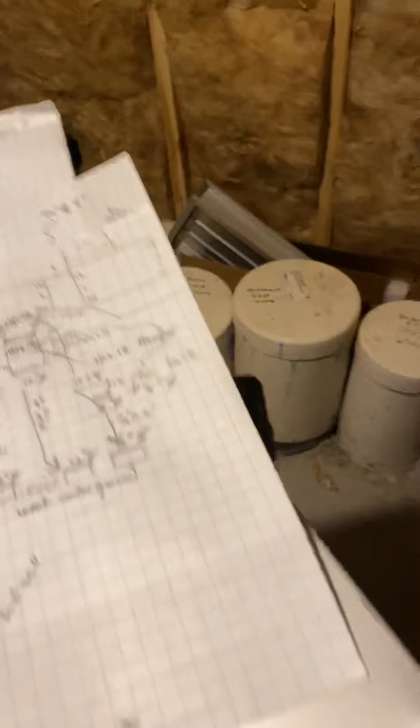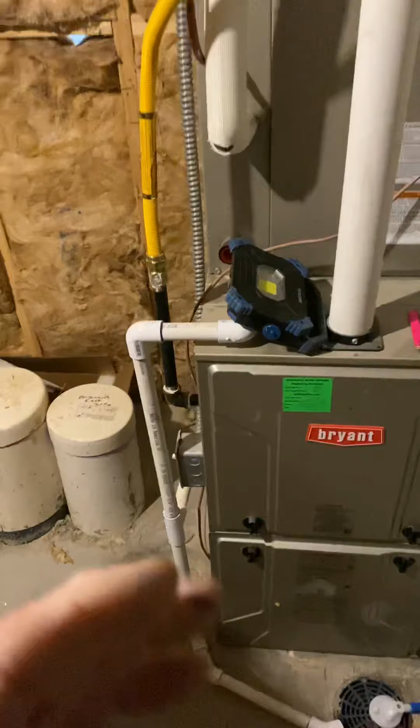Okay, this is on the fail job, number 53359. Okay, what we're doing is a basement redo. We're going to redo the duct a little bit and/or a lot and add some zones. So

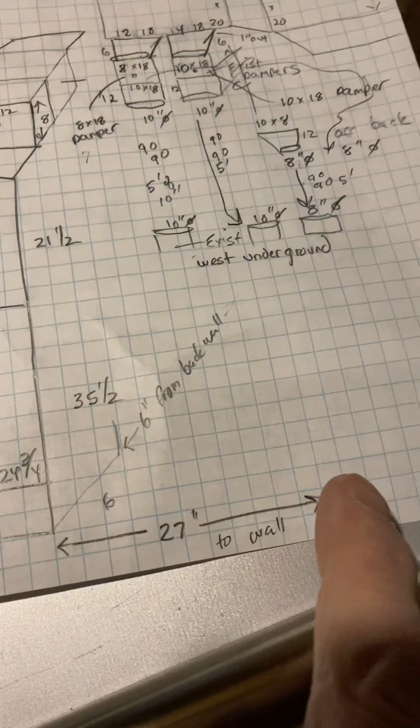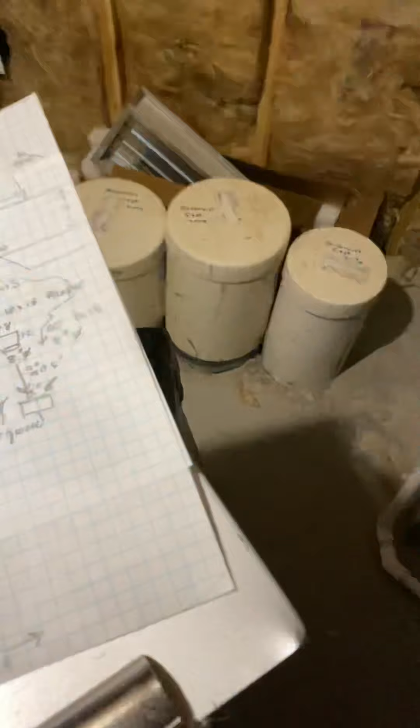right now we're going to move our furnace so it's 27 inches from the right side wall. We're also going to move it up so it's 6 inches off the back wall. We're going to do that so we can run a return air behind the furnace, a 6 by 36 return air around the furnace and along this wall.

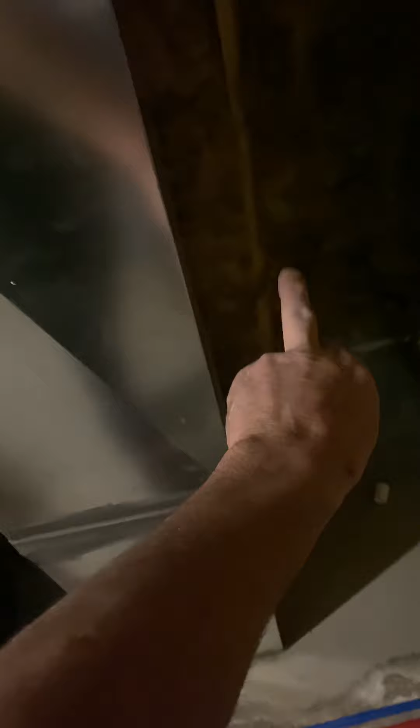We're going to put a return air here for that bedroom, a little 14 by 8 baseboard. And in the back here, we're going to put a big 36 by 10 baseboard grill in the hallway here. Get it over here. They're actually going to have a beam here, and they're going to redo the framing here. You can see kind of on the ground, I think. So get it over here.

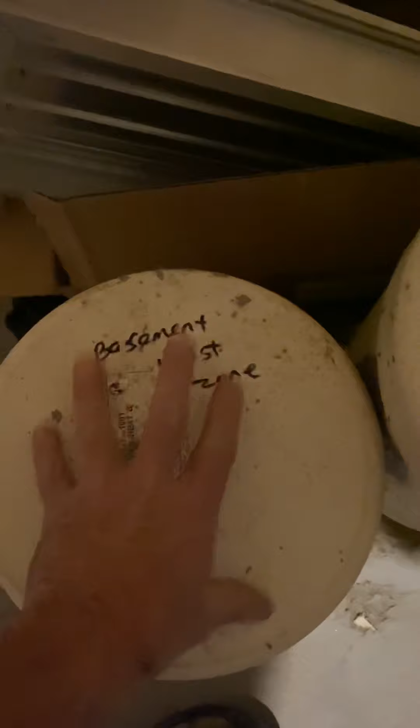Okay, so this zone's a little bit different than the scope. We're going to make it 5 zones. Okay, so this basement west zone is 1 zone. These other 2 pipes on the right are 1 zone. So I wrote them as basement east. So it's 2 10-inches and an 8-inch round. Then

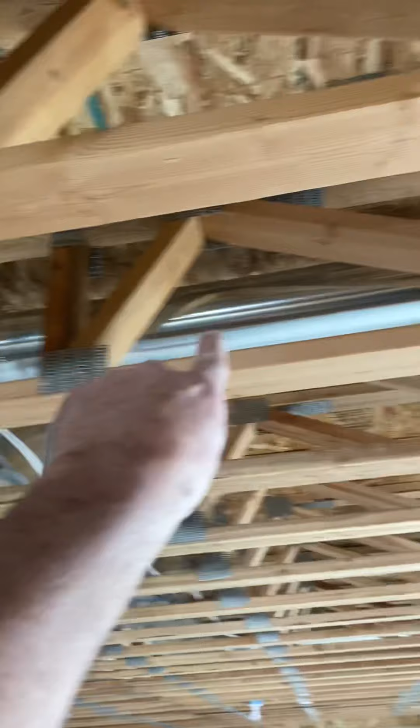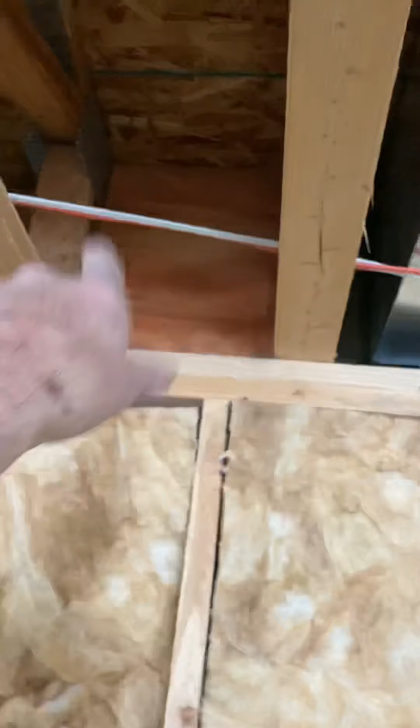the master bedroom, which is this duct here, is going to be 1 zone. We will have to take off some heat vents. So this vent here and this vent here, we need to take off and patch. Otherwise, I'm just going to leave that. And I have a cut line right there. Next to it, we're going to run another pipe, a 10-inch round, with Y's.

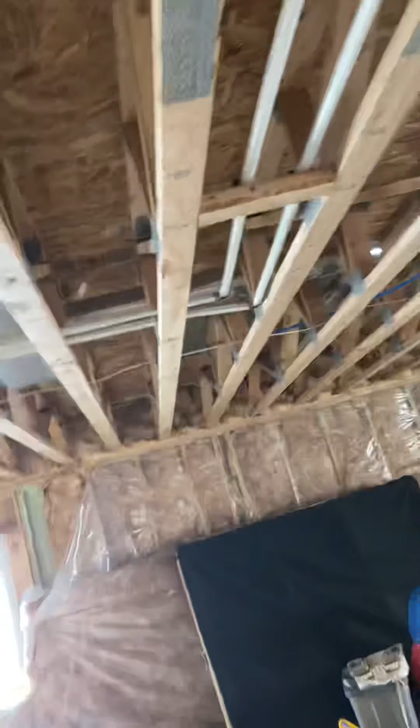So we're going to have a 10-6 Y just in the hallway here. We're going to run 6 inches over and then go that way and get that one here that goes under the kitchen sink, the toe kick. And we'll disconnect these 2 off this end cap here and put a new end cap on it.

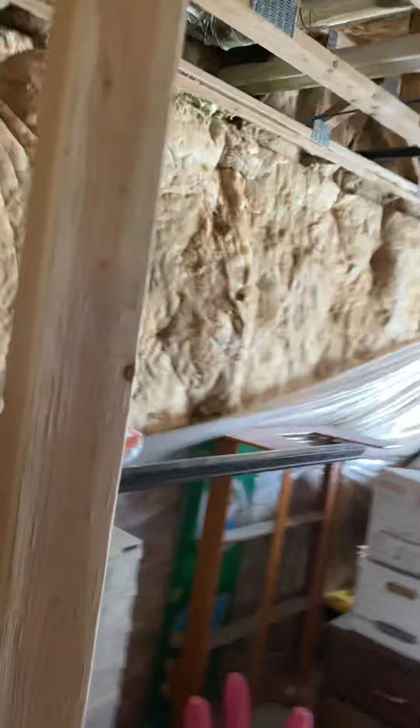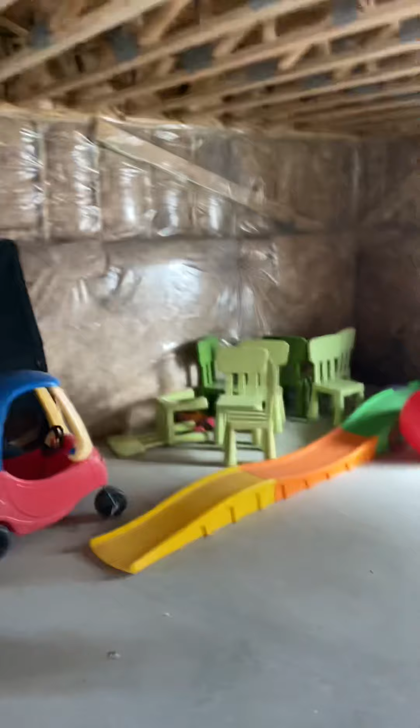But otherwise, those 2 are going to come off this other duct that we're going to run with all the Y's. So the Y's are going to pick up those 2 that we capped off over here and these 2 that we take off over here. And that'll be its own zone. Sorry, and this one here. So those 3. Okay.

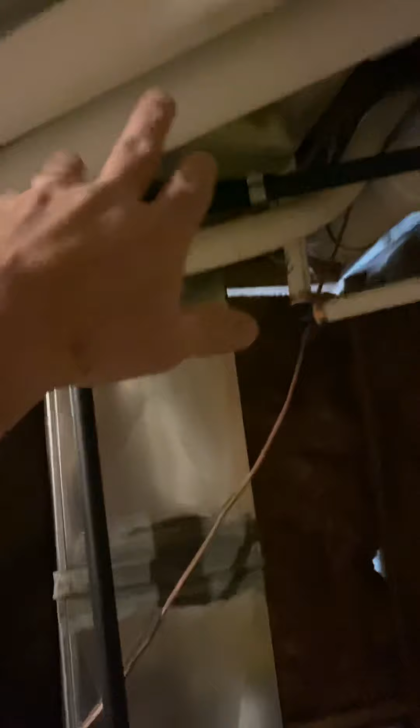Next, so all this ductwork is coming out. All this return air is coming out all the way. Rip out all the panning, all the return air duct, all this panning, all this duct all the way down. In place of that, he doesn't want any duct board. He wants to be able to brush the ducts with the duct cleaner. So

I gave you some flat metal that we're going to put here and then just some duct board headers. And then we're going to run 12-inch round pipe from one box to the other. 12-inch round all the way over and then down, and poke through here. And then, okay,

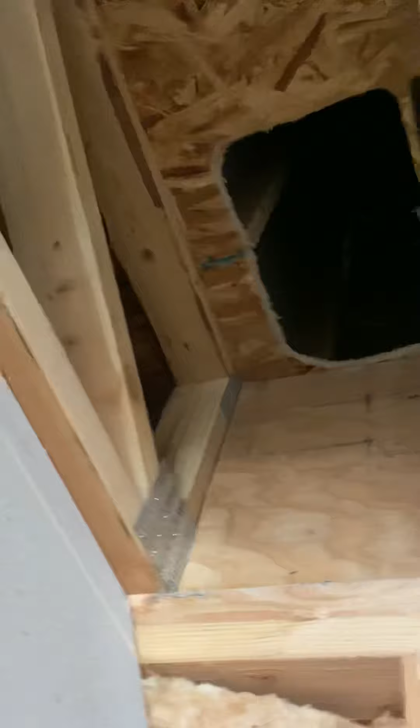this is also a return air. So I gave you a piece of panning for here as well. And we're just gonna have to blank this off with metal the best we can. Well, I'll go over that in a minute. Okay. So

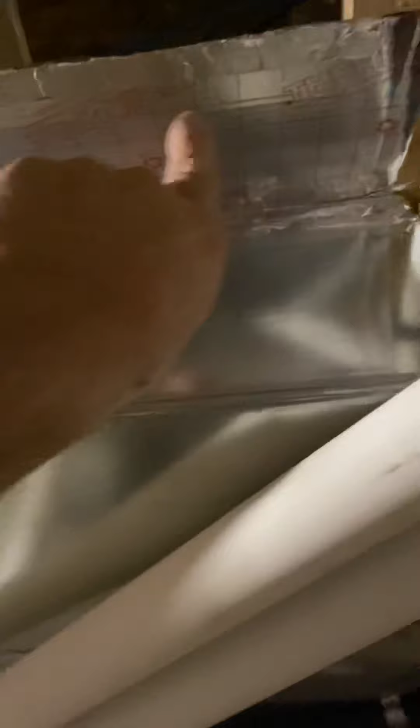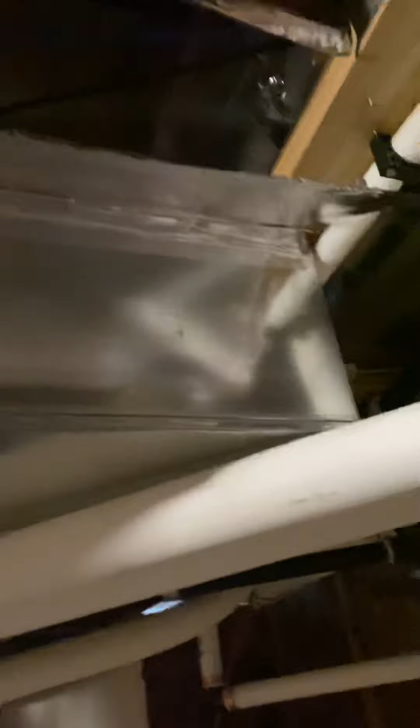on this duct here, I have a cut line just right here. And here you're going to just put a square around here. All this is coming out, this is coming out. So this duct here, they actually came through the return. If you can see it. It's a 90 through the return, and it taps into here. But it's all coming out.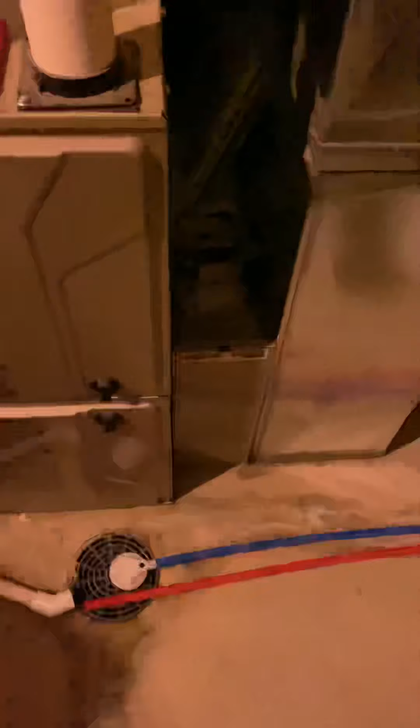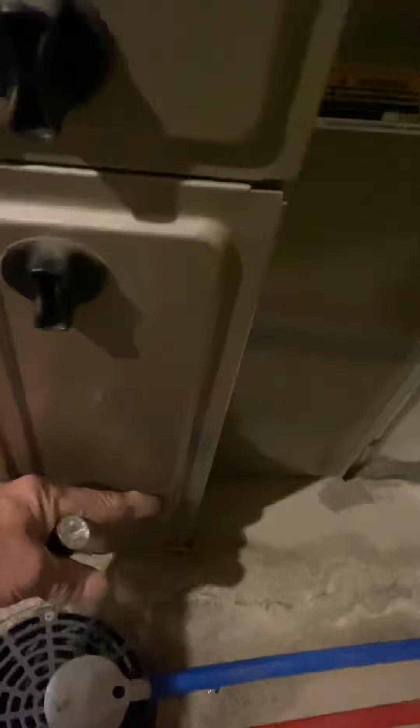Our new return air is going to be on this side of the furnace instead of this side. So we're scooting this furnace over and putting it on a base. And I brought it forward just enough so the edge of the base is going to be right at the drain, I think. And the furnace will overhang the drain. So we're not going to block the drain, but we'll be over it with our furnace.

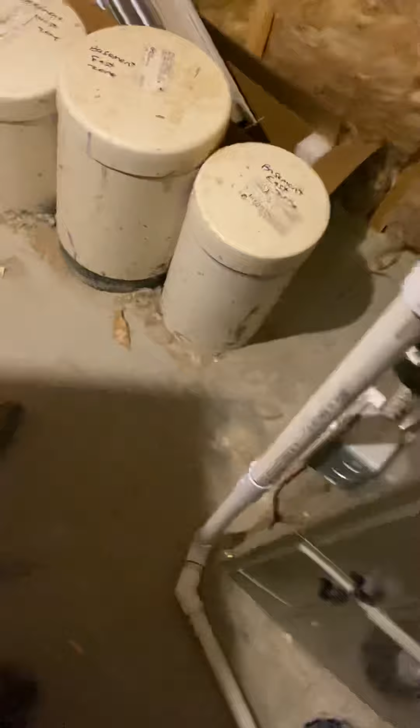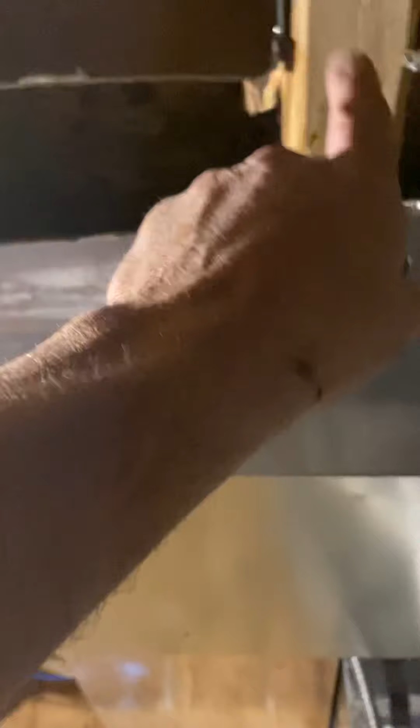Our new return air will come here. And then it'll offset over 20 inches and you'll have a collector box up here. And my notes are all scattered. I need to rewrite them so you can understand.

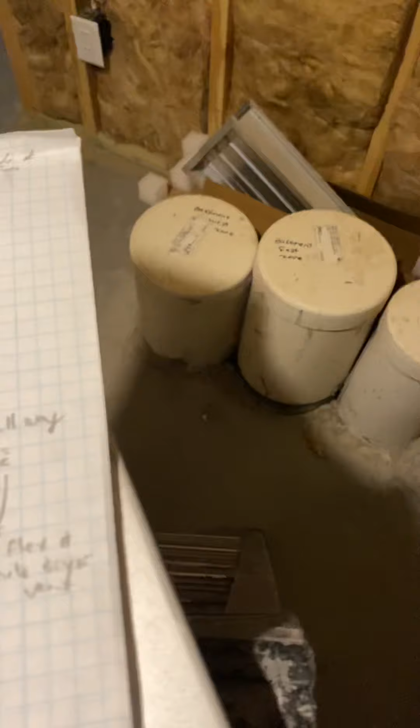But see, where is that one? I'll find it in a minute. Anyway, no, I need to find it now. There it is.

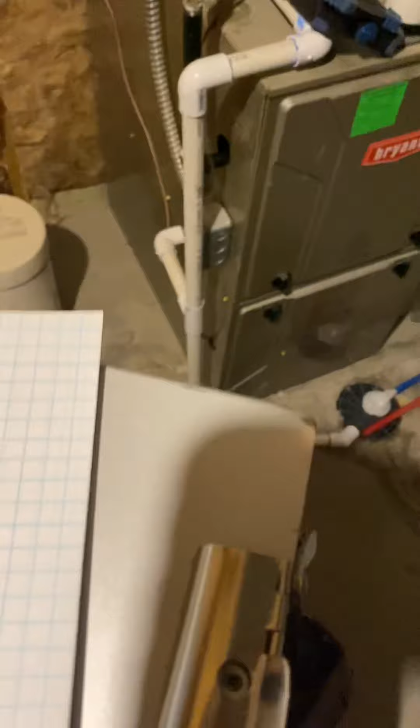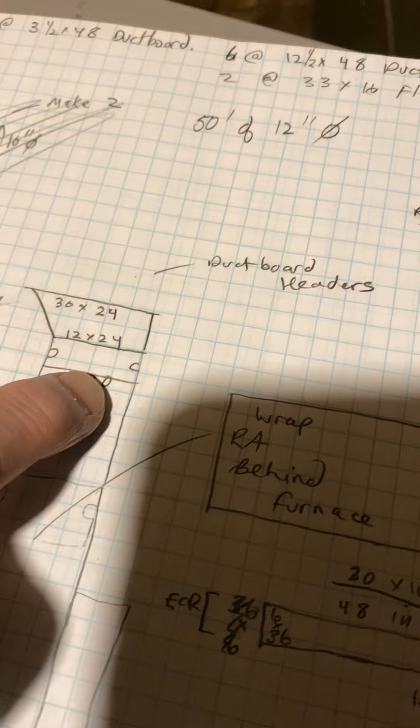Okay, so this will be your return air. This, and then the bottom will come forward 20 inches. I'll put your canvas up here. You have to come down enough before we offset over to make room for our duct coming out the front for the basement zones.

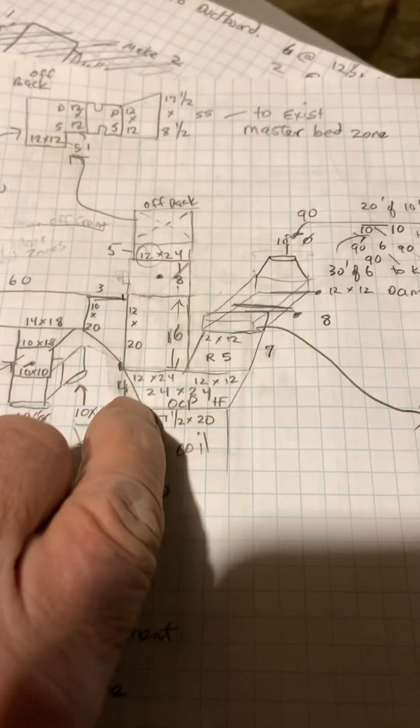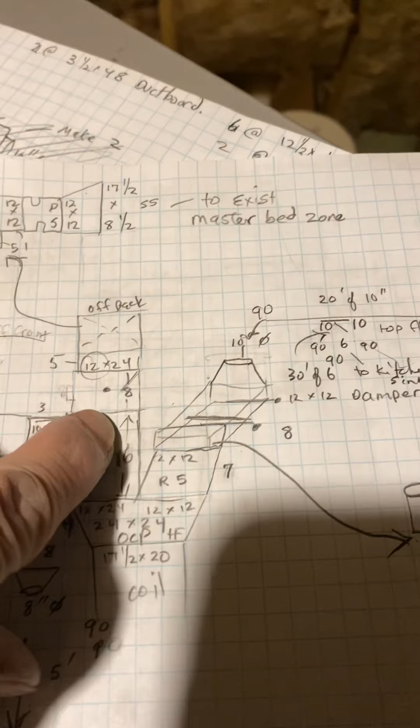But the way that looks is you have the coil, then I have a transition to a 24 by 24. Then you're going to have this piece of duct here, and then a damper, 12 by 24 damper, with the rod coming out the front. Here you have an offset over 5 inches, so you'll offset over on this side of the truss so you can hop up in the middle of them.

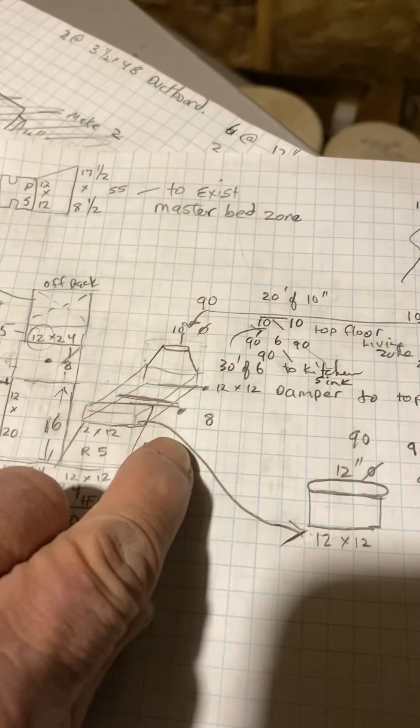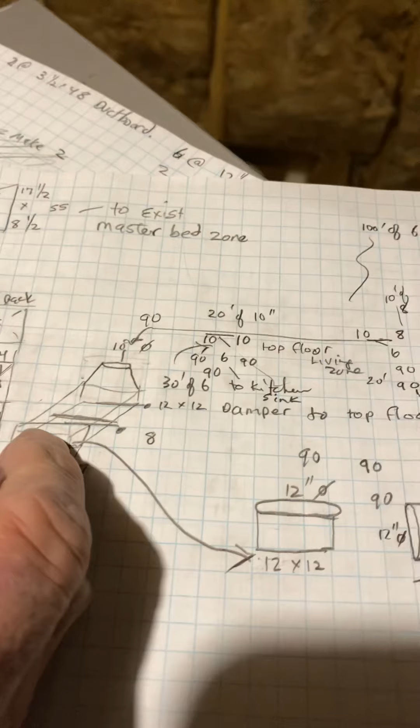And then 2 dampers, 12 by 12 dampers, and then 2 square-to-rounds. This one's 12 by 12 square-to-round, and one up the back would be as well. 12-inch round.

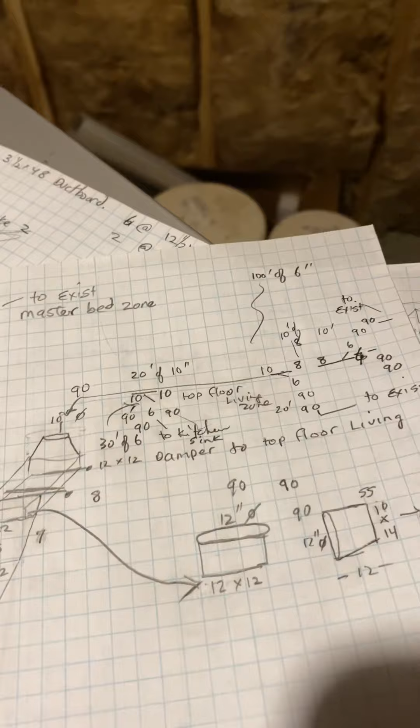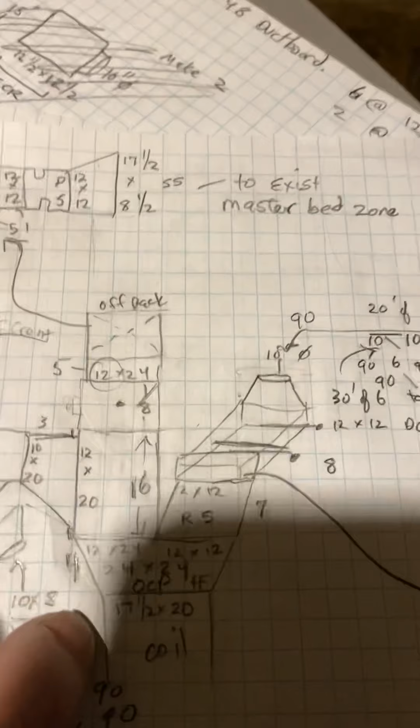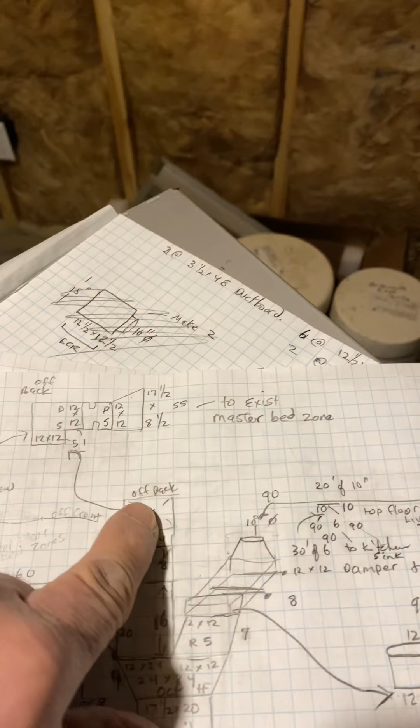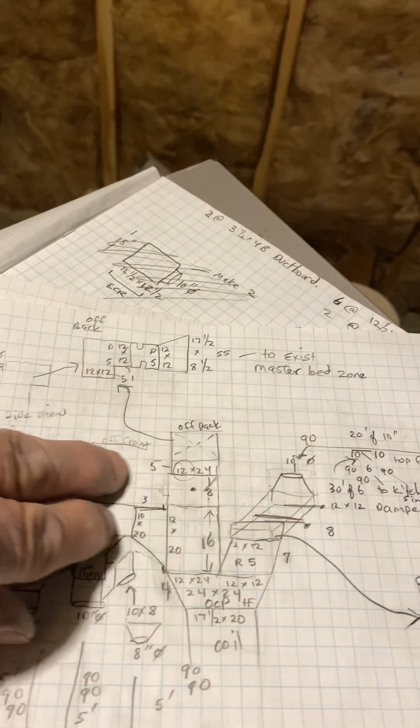Okay, so in this one here, we'll just 90 and then tie into our existing duct for the master bedroom. Okay, under here, that's why I put the damper high here, is so you can get a duct here up the side, a takeoff. 5-foot piece of duct with an end cap. And I have 2 starting collars.

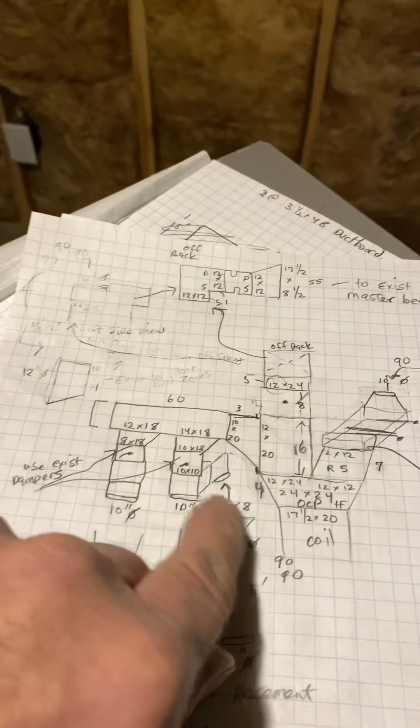And you're going to use the existing damper. So you have that damper here, you're going to reuse on the basement zone, and also there's a damper in a box right there you're going to reuse on the basement zone. And then this one just connects to that pipe. I have 2 square-to-rounds off this one duct. So one will tap into that one. This one will tap into that one. So you have to kind of go around the pipe.

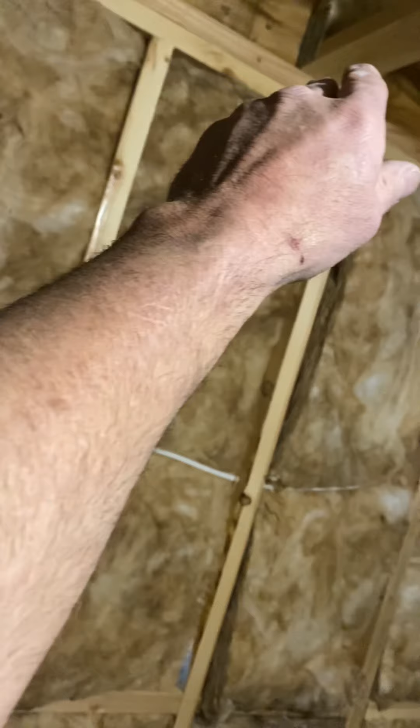Okay, so then the return. You're just gonna, let's see. Oh, I already went over that return. Okay, so

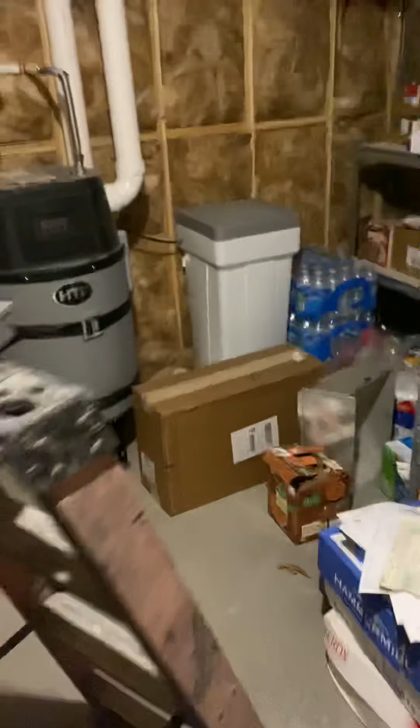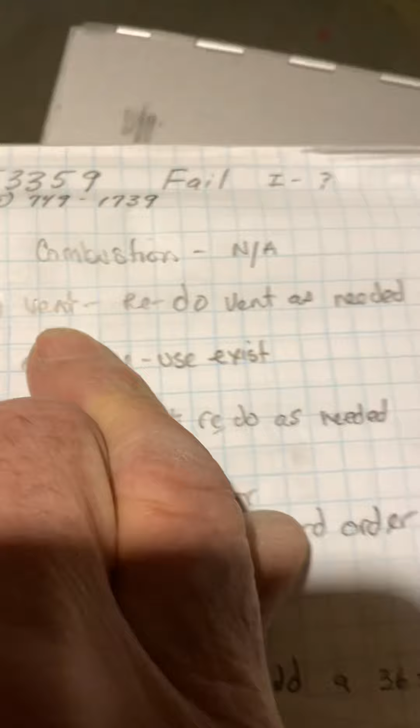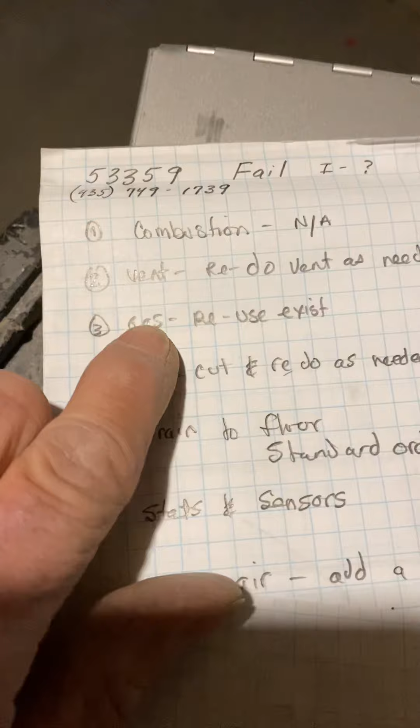Combustion air not applicable. Your vent, since you're going to move the furnace over, you obviously have to redo the vents a little bit. I give you plenty of fittings. The gas, they just have a super long flex here, so you're just going to reuse it and hook it back up as needed. The AC, you will have to cut this line and couple it back together. Okay, drain just to the floor drain there.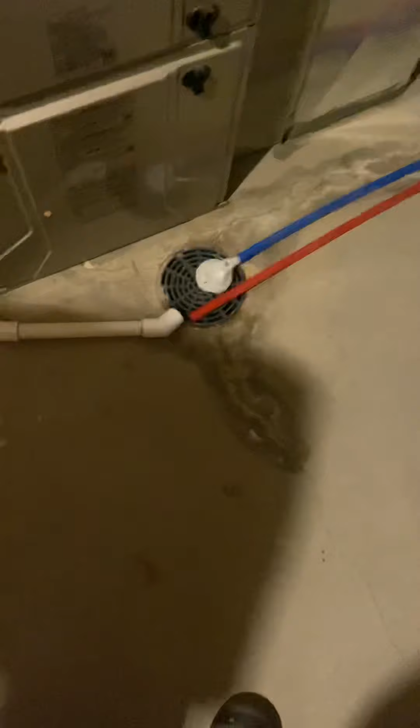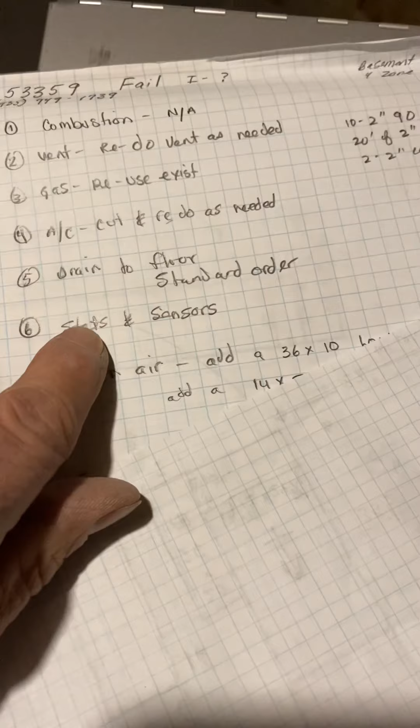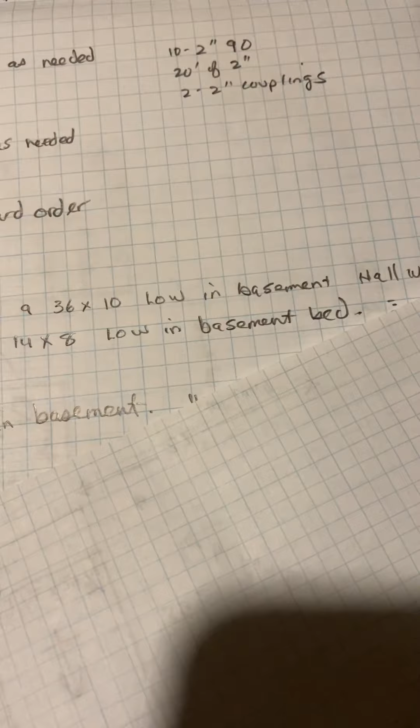Thermostats and sensors. So just the thermostat, homeowner's deciding where he wants all those, but Jimmy will order the sensors. I think the thermostat's on back order. Like a long way back order, but we'll see. This is a Carrier system, by the way. Okay, return air. Oh, I went over that. Okay. So I gave you a few patches to patch the existing runs that are on the master bedroom trunk.

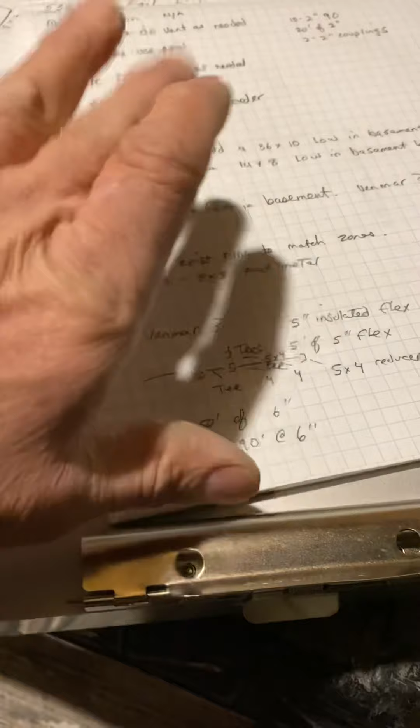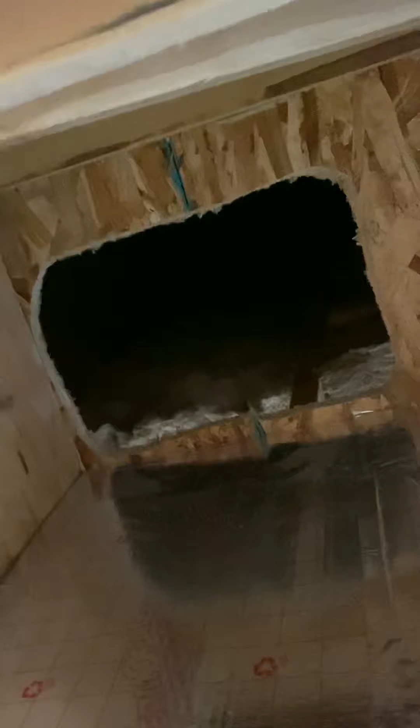So vent the bath fan. They were talking about a Venmar, so I'm pretty sure they're going to put a Venmar or something similar to that. So I'm going to order the stuff for the Venmar. So what Jimmy wanted to do on that is, we have this return air right here. And so up in here, we need to put a header on the top of it to seal the return air. And Jimmy didn't want the insulation in there, so take the insulation in that area out.

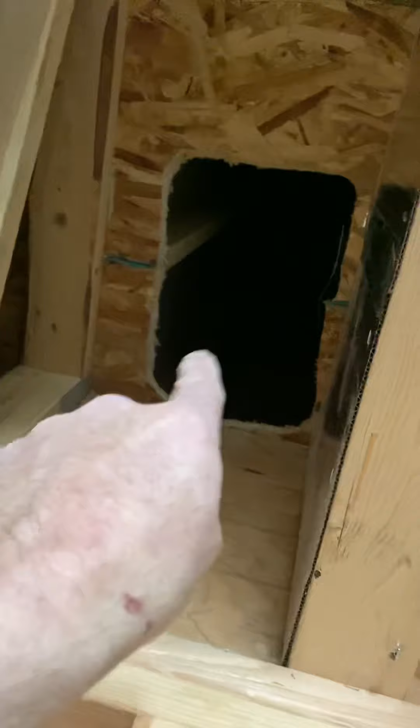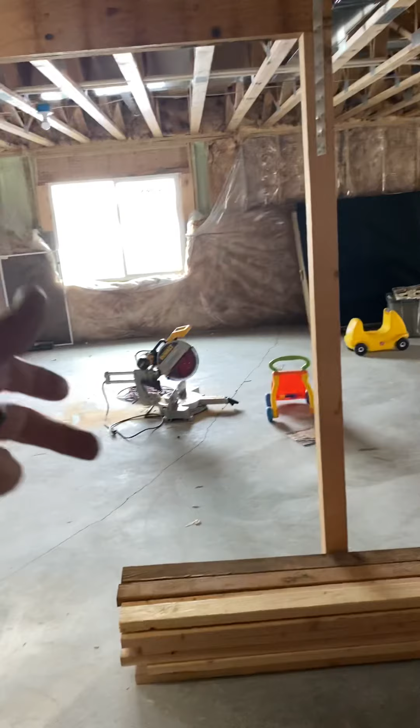But before you do that, we need to run a 5-inch pipe up through, 5-inch insulated flex from here all the way up into the attic. And it's all just a whole big chase up here. And the existing 2 soffits up there, the bath fans that go into the soffit or whatever they do, Jimmy wants to remove those bathroom vents and tap them into our 5-inch flex. So I gave you a 5-inch piece of pipe and a few Tees, and just kind of make it that. I'll give you some 4-inch flex as well. But then run 5-inch flex down here.

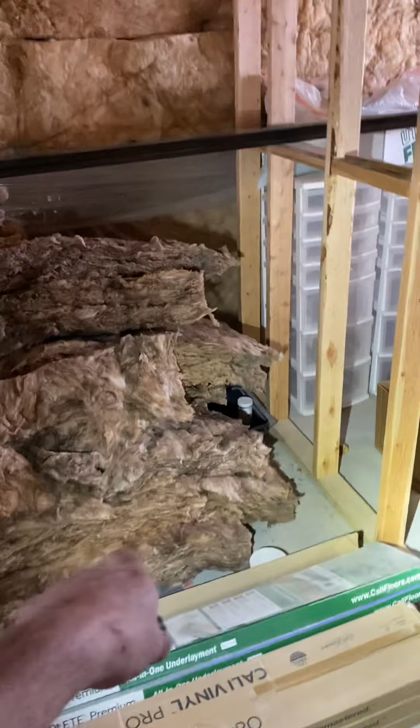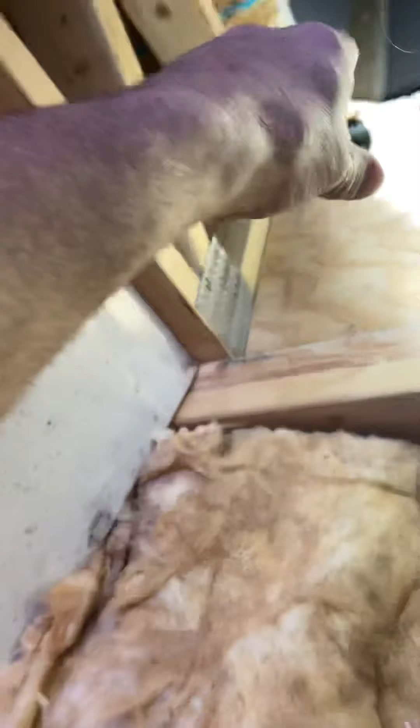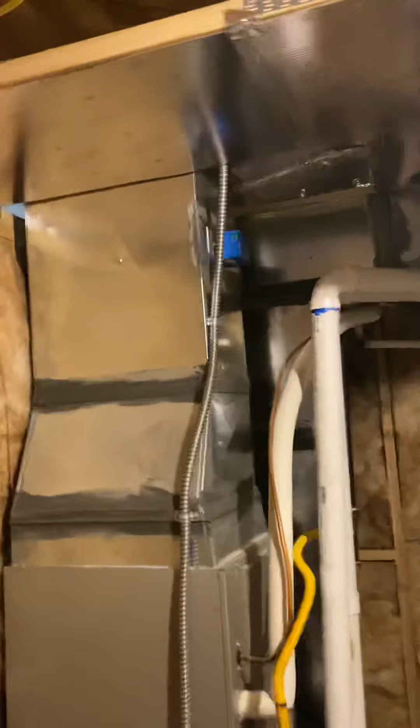And this bathroom fan over here, gonna have to run in through here, if you can. Oh yeah, you can, we have a cut line here, so we're gonna be a little higher. So I think you can fit a 4-inch pipe under through there. And then tap that into here, and then come through somewhere. Probably just come through the joist and then over, and then that'll be your Venmar exhaust.

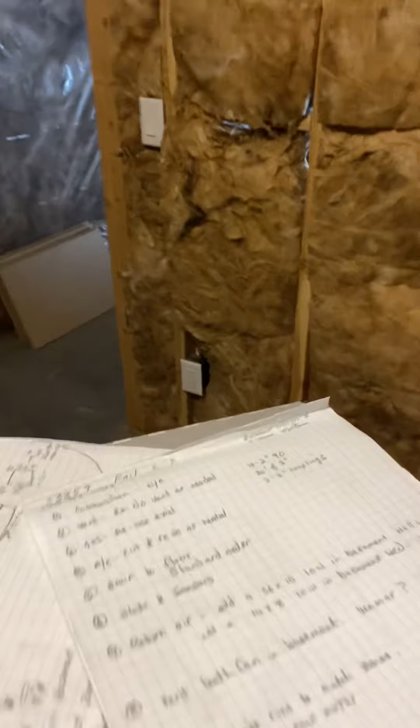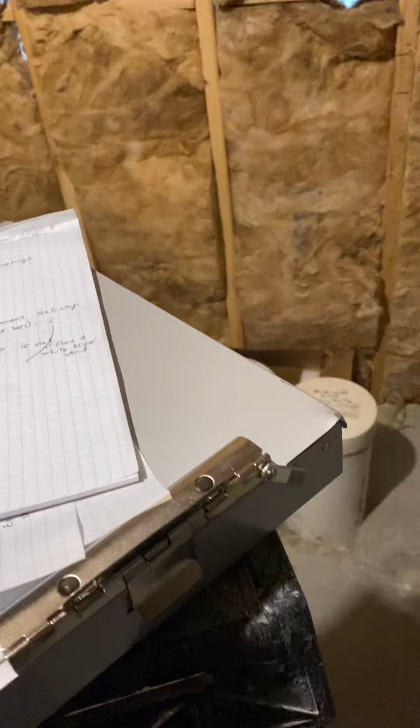And everything else, I'm just gonna order 12 90s and 50 feet of pipe to tap in all the other ones. Jamie said there's a special concentric that he's going to get for the outside. I know nothing about that. So just plan on, you probably have that concentric. Okay. We are going to put on a new filter box, by the way, a 20 by 25 filter box. Okay, I think that's it for now.